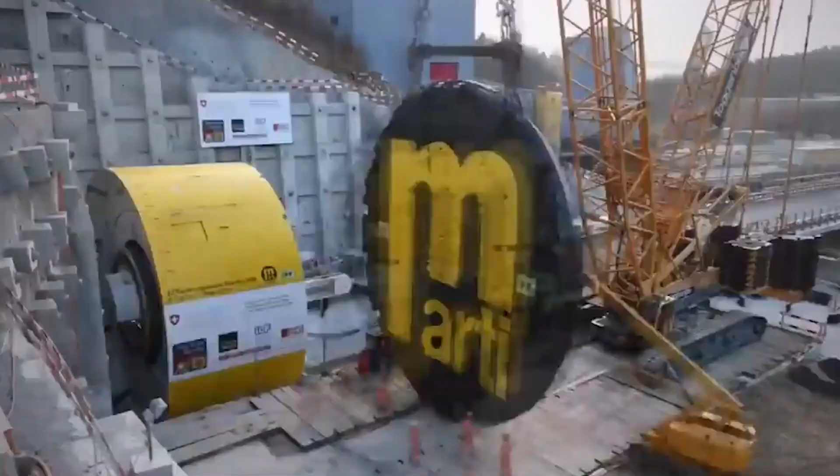Deep beneath the rugged terrain of the Alps, the France Tunneling Project is pushing the boundaries of engineering. Imagine a world where distance shrinks, where bustling cities are but a train ride away, where the pulse of trade is harmonized with the beat of progress. This is exactly what the Turin-Lyon Tunneling Project promises, and the Bussoleno interconnection tunnels are a vital component of this.

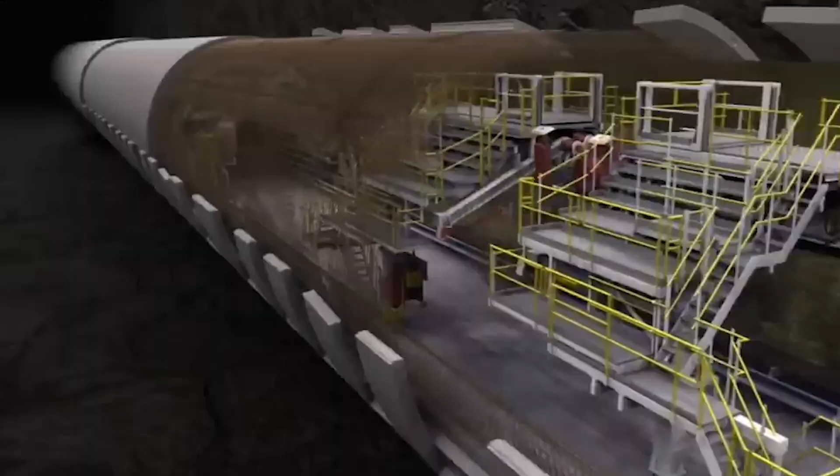Join us as we delve into the ambitious France Tunneling Project, which aims at connecting a new cross-border railway line between Turin in Italy and Lyon in France. The Turin-Lyon Tunneling Project, or the Lyon-Turin Railway Line, as it's more casually known, is a convergence of engineering prowess and visionary connectivity. This ambitious endeavor is being carried out to combine the urban parts of Lyon, France, and Turin in Italy through interlinks of metro lines.

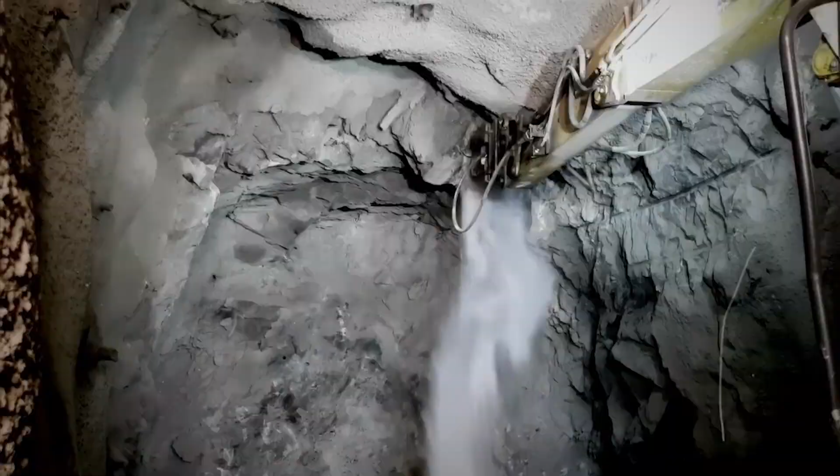Imagine a system of harmonious, high-speed railway lines, tunnels that cut across the heart of mountains, and the bridges that span chasms. The Bussoleno interconnection tunnels encompass preparatory and tunneling works aimed at linking the new cross-border railway line with the historical Rete Ferroviaria Italiana (RFI) line in Italy.

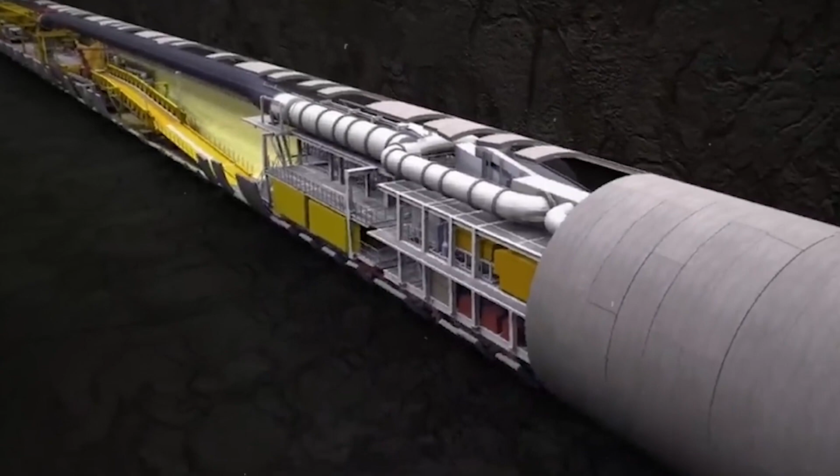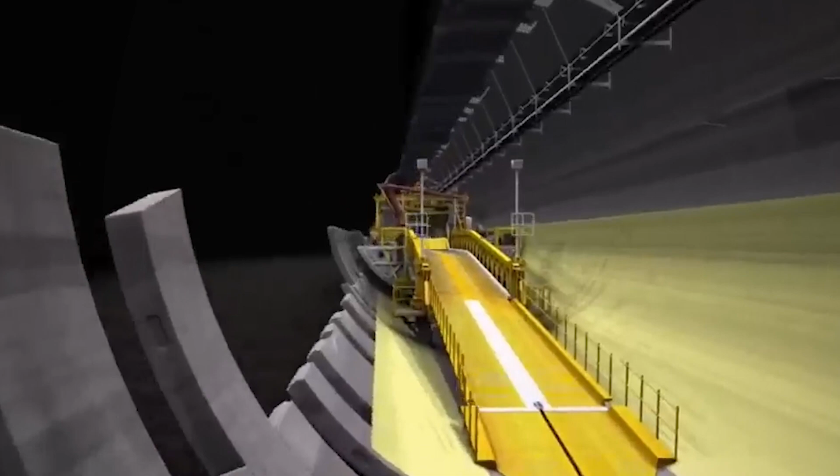This connection tunnel forms part of a broader construction project that spans 270 kilometers of high-speed rail line from Turin to Lyon. It is projected to take approximately 10 years to complete the construction phase, and once completed, the Mont d'Ambin base tunnel will become the longest rail tunnel in the world, surpassing the Gotthard base tunnel.

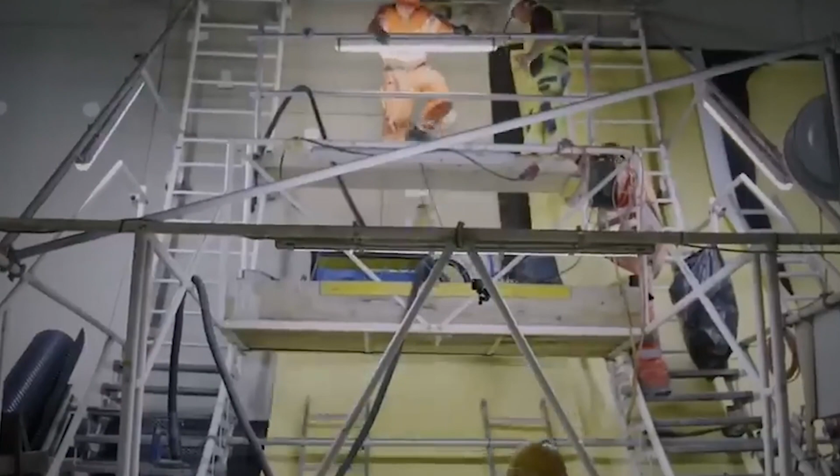But what makes this project worthwhile, and why is it of the utmost significance? Enhancement of connectivity between major European countries is the key. By establishing this link, both countries have a lot to gain in terms of reduced travel times, which will ultimately bring about enhanced trade through freight transportation and therefore economic growth. It will attract investments, create job opportunities, and even impact the environment for good.

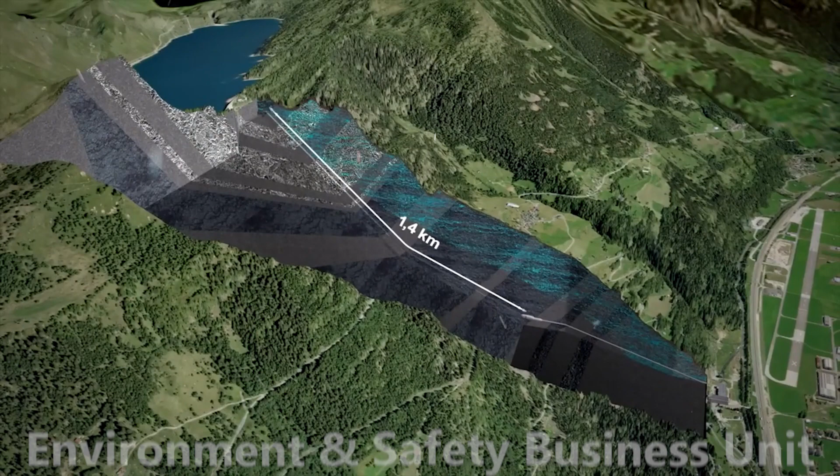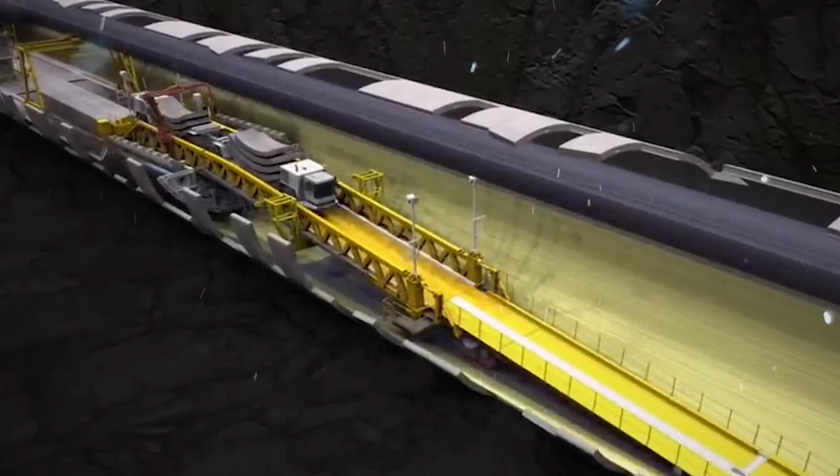And even better, the Société des Contrôles Techniques, Socotec, is acting as a key player in ensuring environmental compliance through the Turin-Lyon Tunneling Project, particularly through its specialized division known as the Environment and Safety Business Unit. However, the Turin-Lyon Tunneling Project is more than just a rail link. It comprises multiple interconnected components that collectively form the foundation of the high-speed rail link between Lyon and Turin. And each of these components plays a critical role in ensuring the project's success.

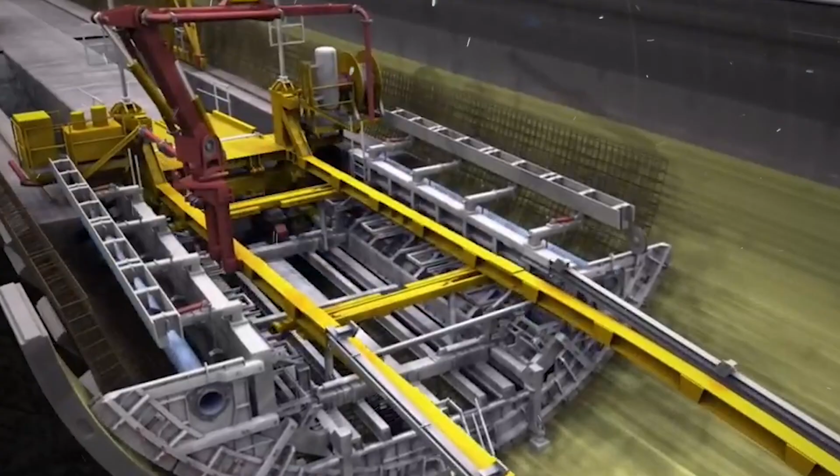There's the high-speed railway lines, which you're already familiar with by now. But there's also the Mont Cenis base tunnel and its accompanying access tunnels, which provide entry and exit points to the base tunnel. Next, we have bridges and viaducts, stations and emergency facilities, lighting, and finally, safety systems. We'll be breaking each component down, starting from the crown jewel, the Mont Cenis base tunnel.

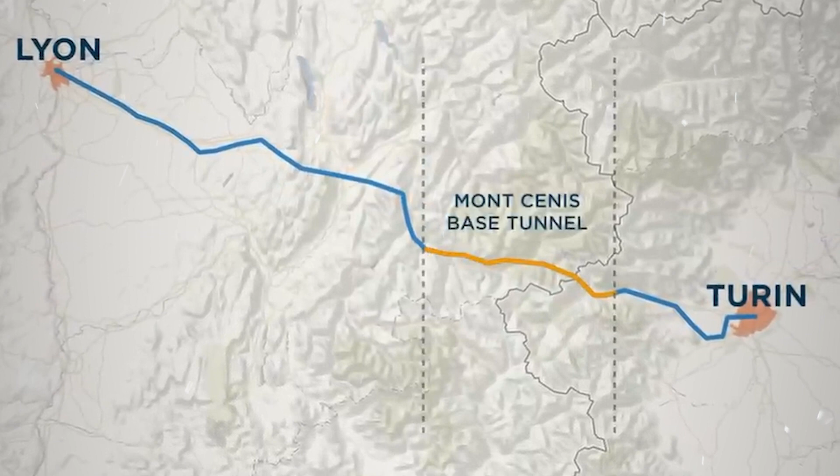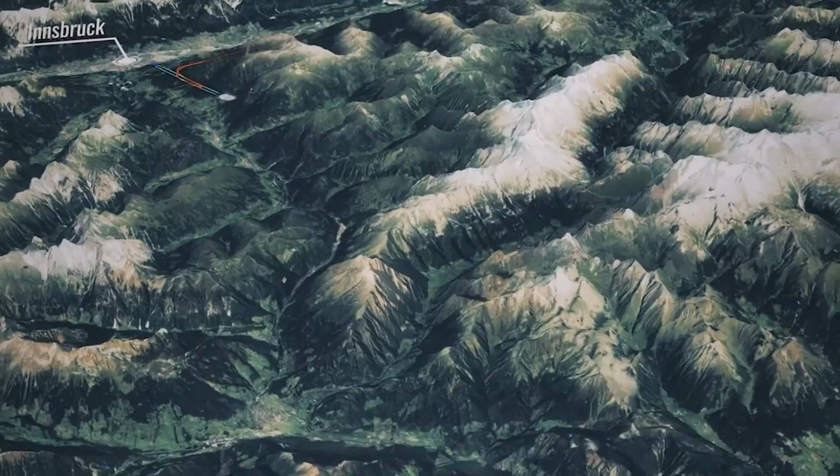Also known as the Mont d'Ambin base tunnel, it traverses the Alps and serves as a crucial section of the cross-border route. You see, this base tunnel serves as the core element, providing a direct route through the Alps, overcoming the challenging mountainous terrain that previously posed barriers to efficient rail travel. A subterranean marvel, this tunnel with its twin tunnels stretching over 57 kilometers doesn't just traverse the Alps, it practically erases them. With the base tunnel in place, high-speed rail doesn't need to dodge mountains, it just surges through them.

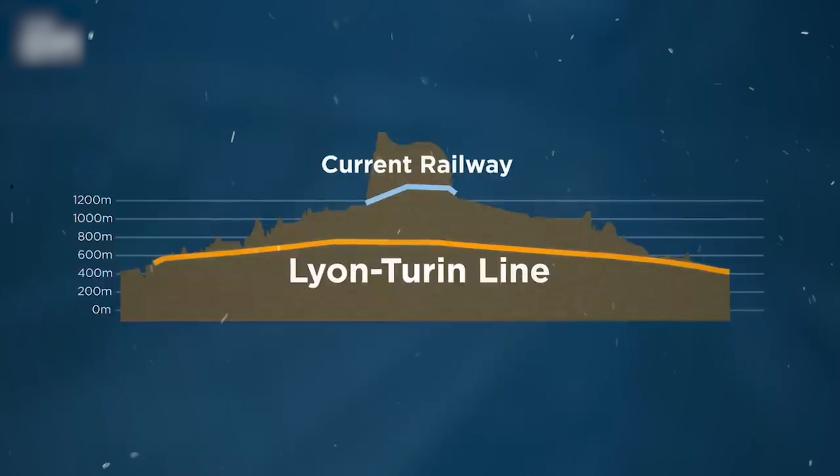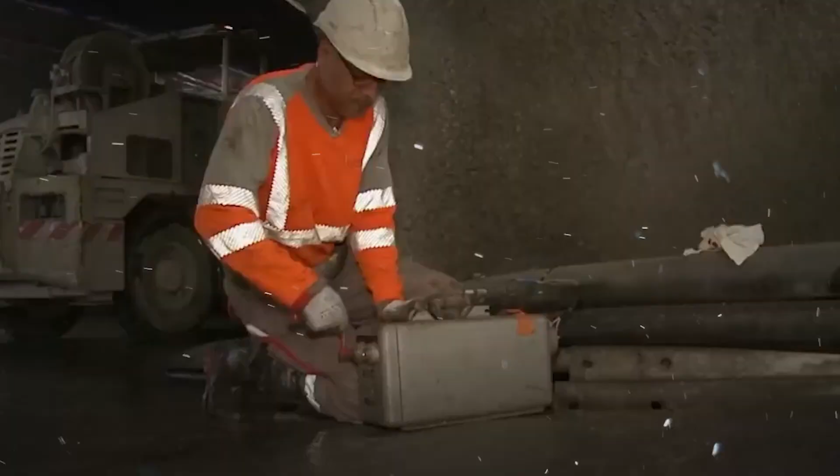Stretching over an impressive length of 1.9 kilometers each, the construction of the Bussoleno Connection Tunnel involves the excavation of 2 single-lane tunnels. These tunnels will be equipped with the necessary infrastructure to ensure seamless connectivity, including 2 interconnection chambers that will facilitate the integration of the future Orsiera tunnels on the western entrance side. Additionally, the project requires the construction of 2 portals and their associated cut and cover sections, providing access points to the tunnels. 2 dismantling chambers will also be built to house the tunnel boring machines used for excavating the Orsiera tunnel. To enhance safety and accessibility, 6 cross passages will be constructed within the tunnels.

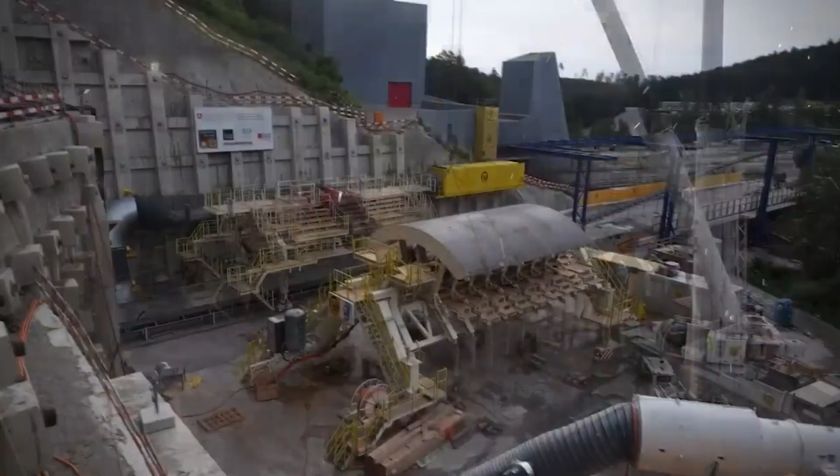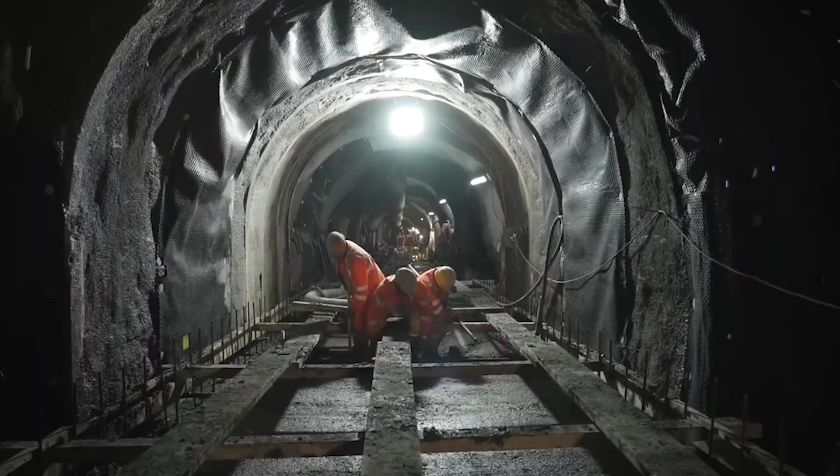Needless to say, the Bussoleno interconnection tunnels, with a project value of about 140 million euro, hold immense significance for the region's transportation landscape. It is expected to have a construction duration of about 86 months. One of the key benefits of the Bussoleno interconnection tunnels is the reduction in travel time between Turin and Lyon. Currently, the journey between the two cities involves a circuitous route leading to longer travel durations and inefficiencies. Once the high-speed rail line is completed, the Bussoleno interconnection tunnels will provide a direct and efficient connection, slashing travel times and enhancing convenience for commuters and businesses alike.

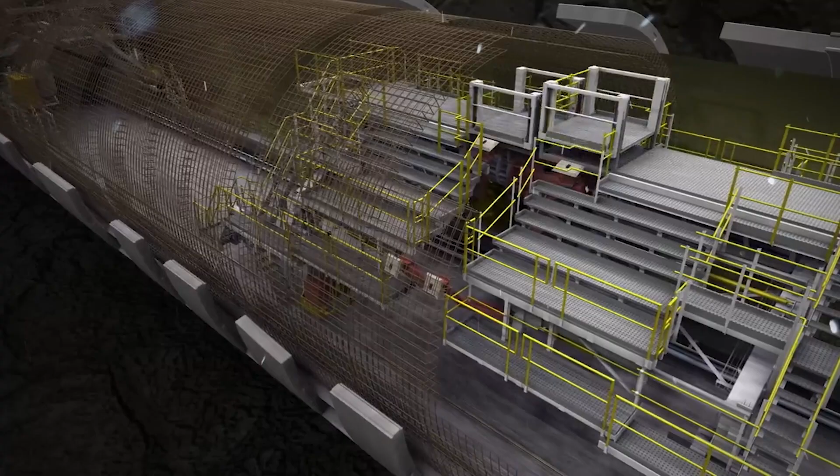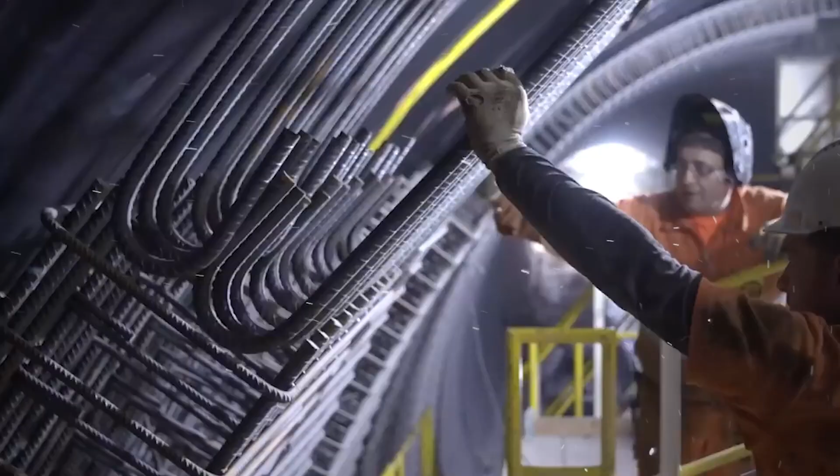Next, think of access tunnels as the gatekeepers, ushering trains into the mountains and releasing them back into daylight. Of course, stations and emergency facilities enhance passenger safety, convenience, and emergency response capabilities. The bridges and viaducts provide critical connections, allowing trains to traverse obstacles, and lighting systems contribute to passenger safety and operational efficiency within the tunnels and stations.

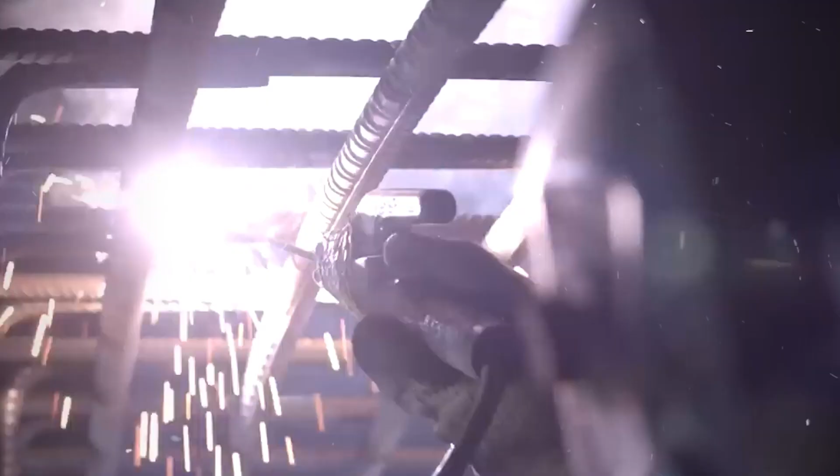It might sound pretty clean-cut and clear, but no grand project is without its obstacles, and this grand tunnel project certainly has its. The Alps may be scenic, but construction here is no easy feat. They consist of complex geological formations, towering overburden depths, and pressurized rock conditions that demand respect. From Ultra-Dauphinois to Briançonnais and Piemontais, each formation presents a unique puzzle as they vary in composition, hardness, and stability, posing significant challenges for tunnel excavation and rock support.

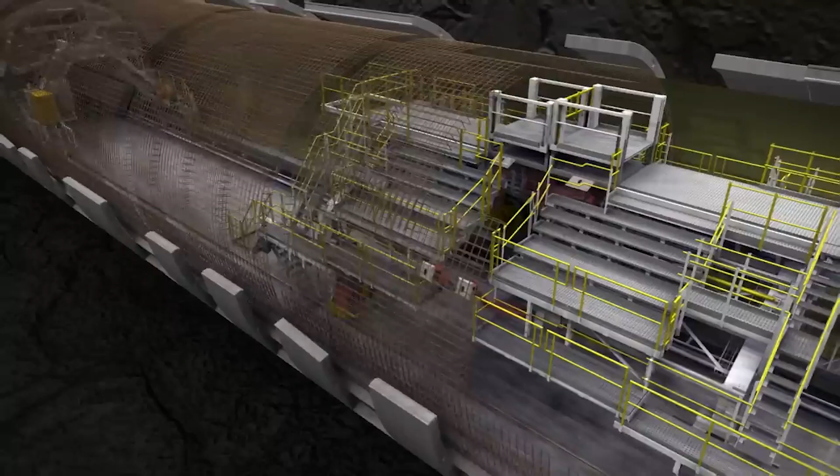Then there's the fact that the tunnels are being excavated at substantial depths, with overburden reaching up to 2,400 meters. Some sections of the tunnels also encounter pressurized rock conditions, leading to squeezing and potential rock bursts. Pressurized rock formations can also cause stability issues. These challenges require specialized solutions, a symphony of excavation methods, and innovative methods that would conquer the challenges posed by formidable rock formations and pressurized conditions.

Introducing TBMs, tunnel boring machines that relentlessly chew through the earth, carving out long tunnel sections with mechanical precision. These giant machines represent the pinnacle of tunnel excavation technology, offering a continuous and efficient method for navigating the rocky labyrinth that lies ahead. But not all sections can yield to the mechanical prowess of TBMs.

In areas where the rock conditions prove particularly unforgiving, the NATM, New Austrian Tunneling Method, steps in. NATM employs a more hands-on approach, involving a delicate dance of drill and blast. Here, skilled workers meticulously drill holes, strategically place explosives, and orchestrate controlled blasts, carefully sculpting the tunnel profile and the challenging geological backdrop. Excavation alone is not enough to ensure the stability and safety of the tunnels.

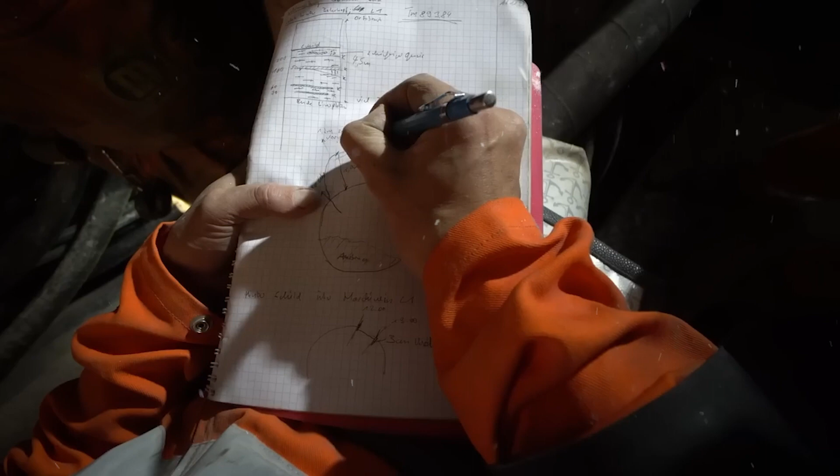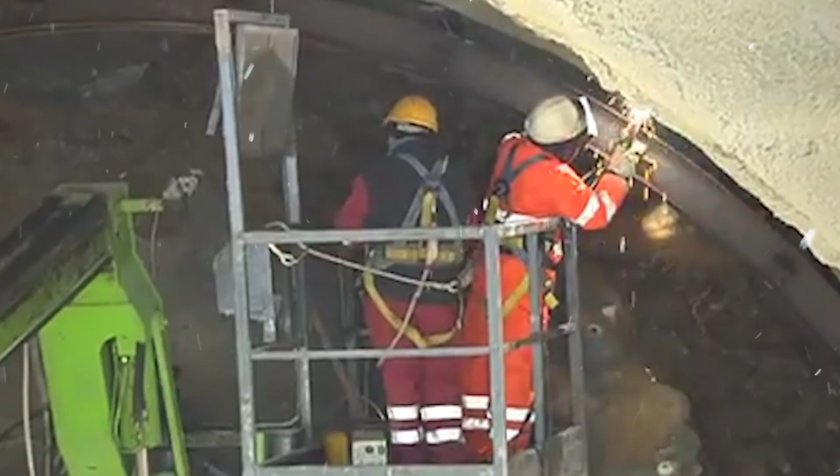Rock support becomes very important. Shotcrete, a special blend of concrete and other materials, is sprayed onto tunnel walls, creating a protective layer that stabilizes the surrounding rock. Additionally, rock bolts are installed, acting as the unsung heroes that reinforce the rock and stand guard against potential collapses. In sections where the rock quality leaves much to be desired, steel arch supports swoop in to save the day. These resilient structures provide much-needed reinforcements, distributing the load evenly and offering an extra layer of support where it's needed most.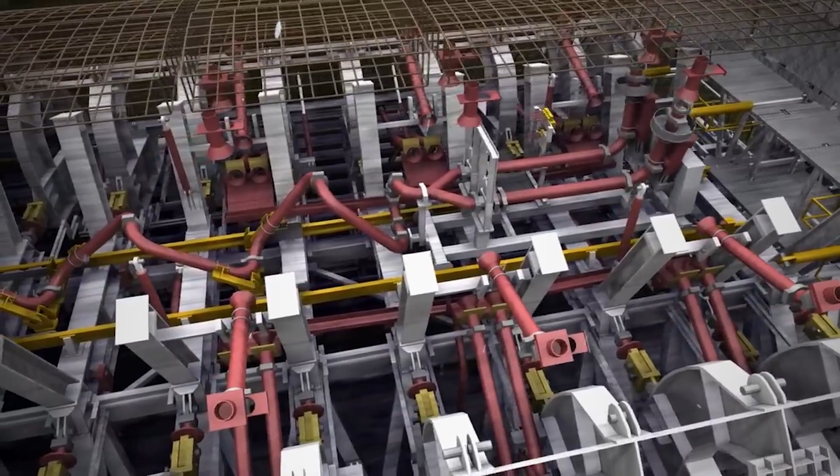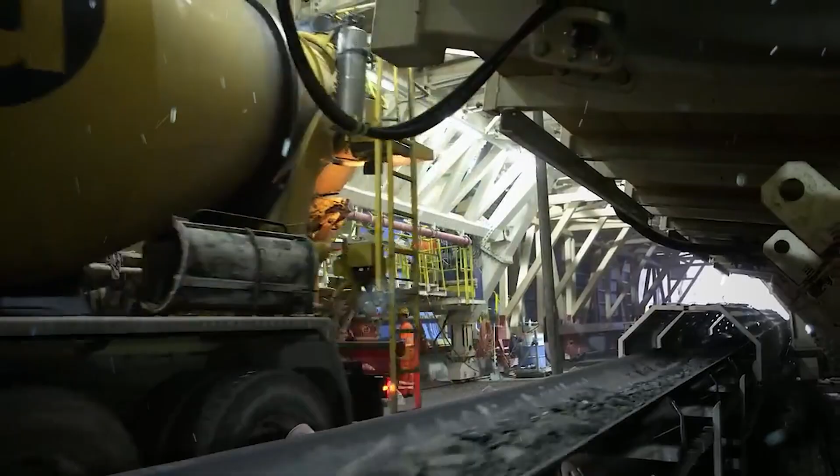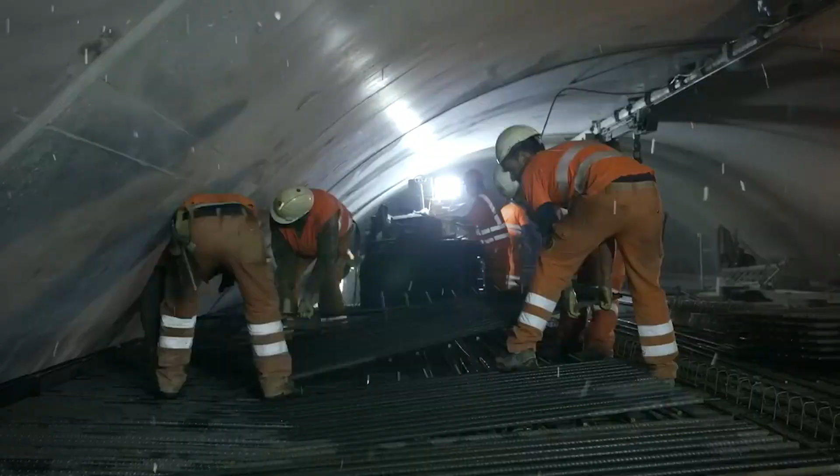Every aspect of the tunnel, from the diameter to the shape, is carefully considered to navigate the unique geological conditions at hand, and as construction progresses, ventilation and safety measures take center stage. Pressurized rock conditions require effective ventilation systems to manage gas emissions and pressure changes. Ventilation shafts are strategically placed, ensuring a constant flow of fresh air deep within the tunnel's belly. This creates a safe working environment for the construction crews, allowing them to navigate the challenges with confidence.

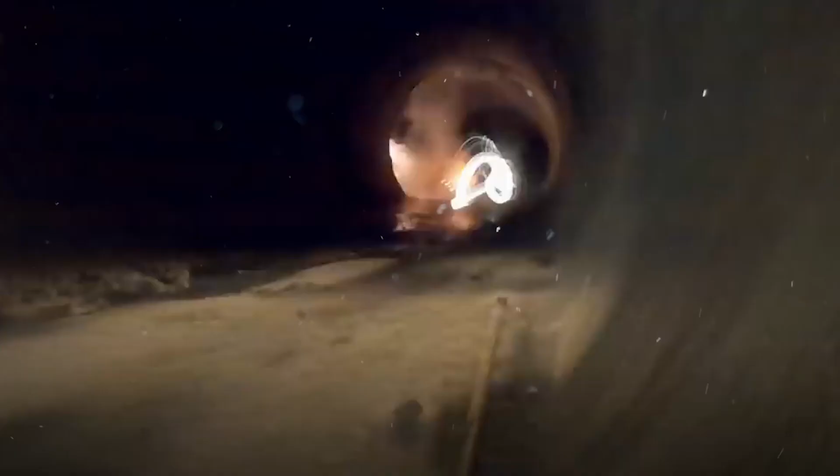But safety doesn't stop at ventilation. Advanced monitoring systems become the silent guardians, tirelessly tracking every minute movement of the rock, every shift in pressure, every geotechnical factor that could hint at potential hazards. Real-time data also provides invaluable insights, empowering the construction teams to anticipate and adapt their methods, ensuring the safety of both the workers and the tunnel itself. So the experts found a way to work around the drawbacks.

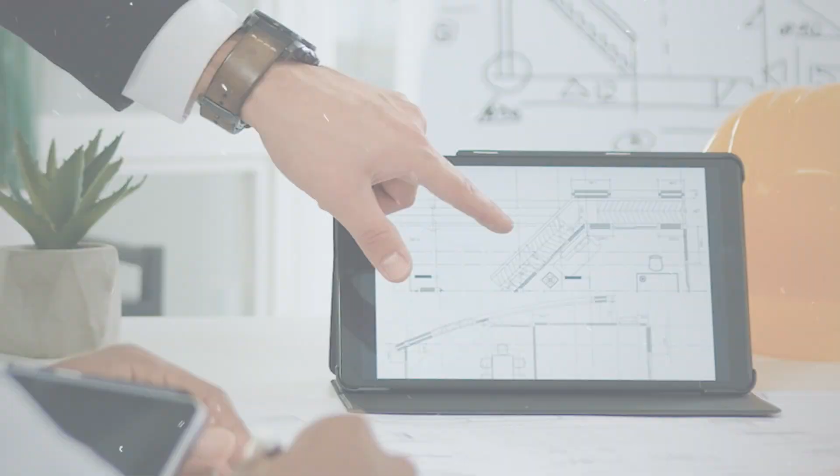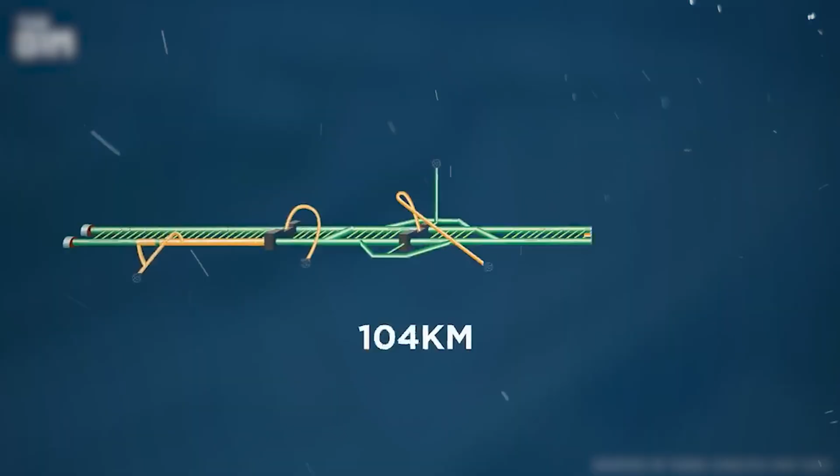But we can all agree that these specialized solutions and brilliant fixes the experts came up with obviously require some huge funds. So let's dive into the visionaries at the helm of this project. This project couldn't have been executed without the collaboration of certain stakeholders. At the center stage are the governments of France and Italy. They're in charge of directing the funding, strategy, and regulatory oversight. But Tunnel Euralpin Lyon-Turin, TELT, is behind the project's implementation. This company's coordination of design, construction, and finance is of epic proportions.

Lastly, the European Union, akin to a patron, handles the financial support. And we're talking about a lot of financial support. The EU has committed to providing 40% of the financing, but there is a possibility of increasing its contribution to 50% and partially funding the French accesses, depending on certain conditions. About 8.6 billion euro hangs in the balance and is estimated to be the cost of the project. This budget encompasses various aspects of the project, including tunnel excavation, construction of access tunnels, development of rail tracks, installation of safety and electrical systems, and more.

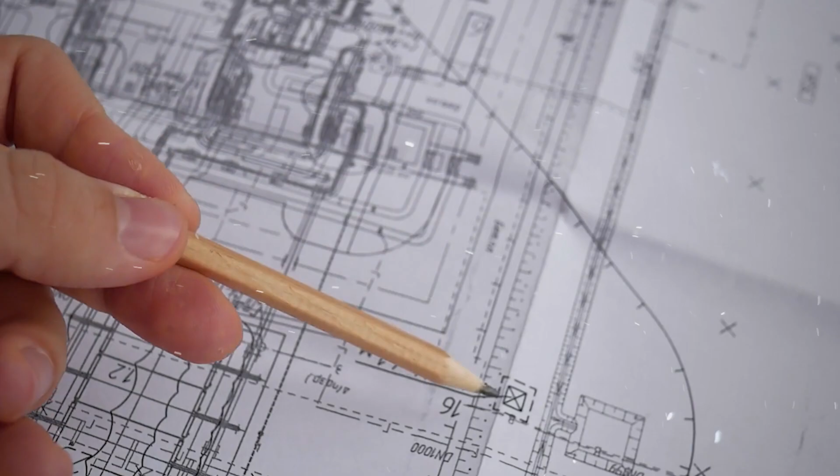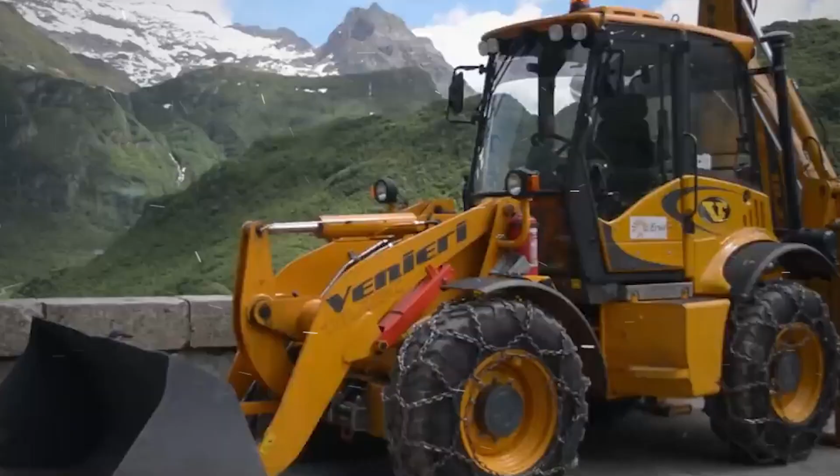But it's not just the EU's doing. This project is co-financed by other peripheral stakeholders, with contributions from both France and Italy. With such backers, it's no wonder there's so much innovative engineering in the construction of this undertaking. But it's not all rosy, and there have been skeptics arising on the matter of the environmental impact of this project. Of course, as with any large-scale infrastructure project, there are valid concerns raised about its impact on water resources, landscape alteration, and carbon emissions during construction.

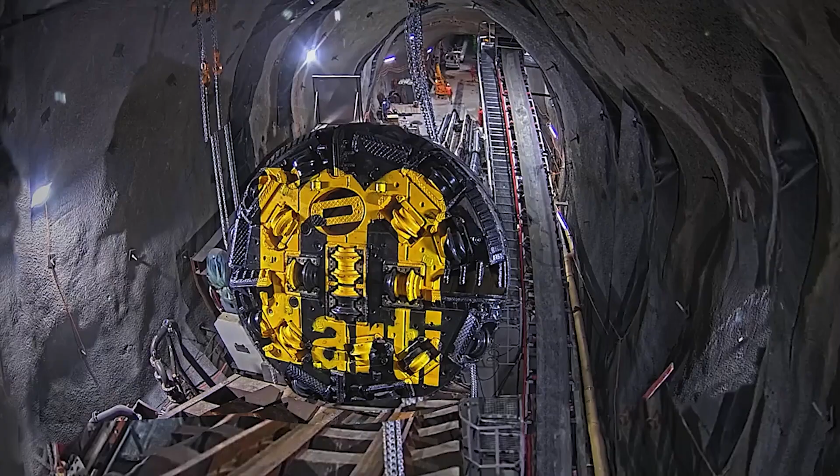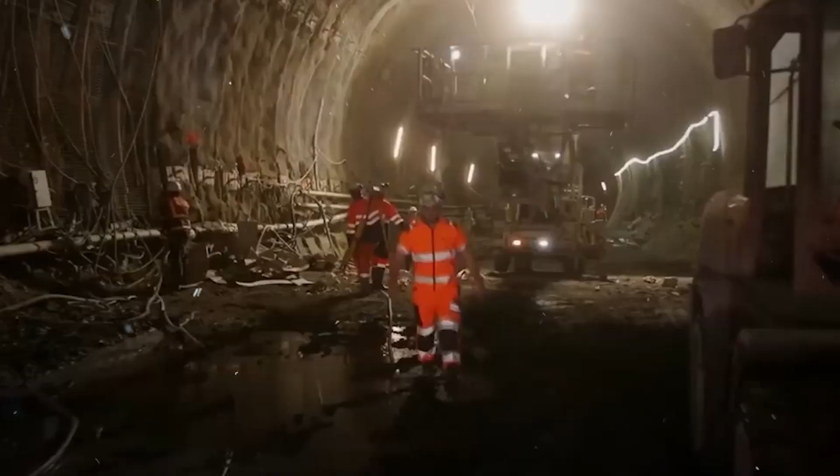For one, water, they say, is a vital resource, and construction's thirst can parch the land. This is true. Critics are worried that the construction activities associated with the project could deplete water reservoirs, causing harm to local communities and ecosystems. However, a counter-argument is that the amount of water needed for construction is relatively small compared to the overall availability of water resources in the region. Backers of the project also emphasize that measures are in place to manage water usage responsibly and minimize any negative impacts. Plus, when you look at the long-term benefits the project brings, such as improved transportation, reduced road traffic, and enhanced trade, these could contribute to regional development and water conservation efforts.

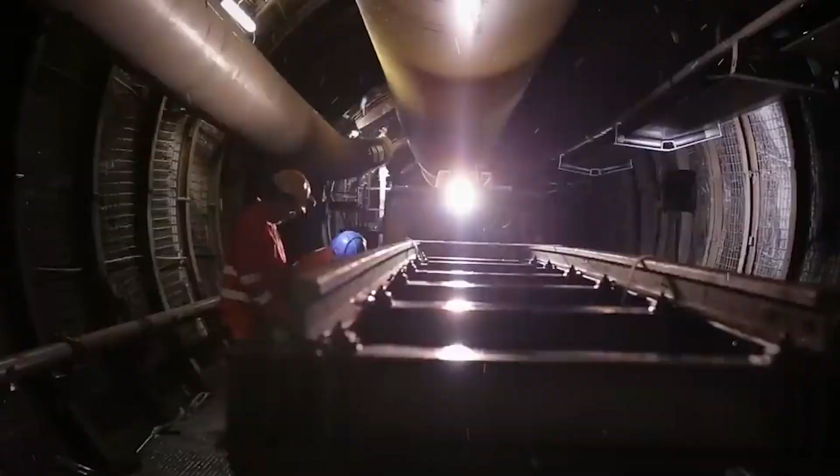Another concern voiced by critics is the alteration of the alpine landscape due to construction activities. Deforestation, excavation waste, and visual disruption are real negative consequences. In response, the project's design takes into careful consideration the minimization of landscape alteration and the restoration of affected areas post-construction, so it's supposedly all good.

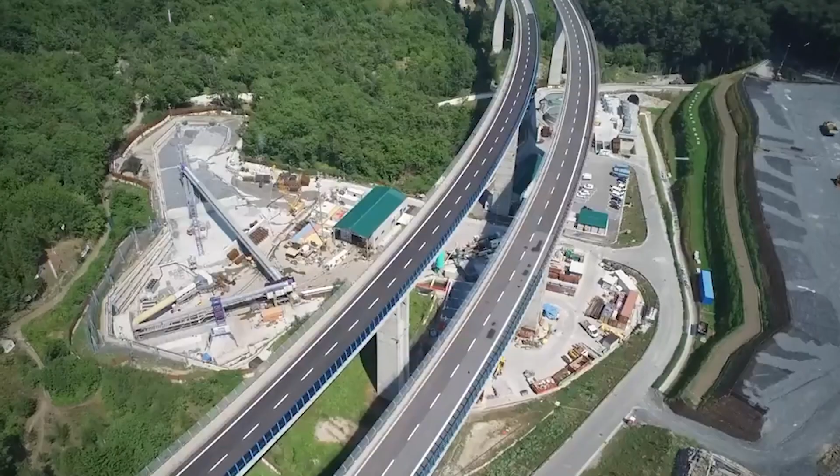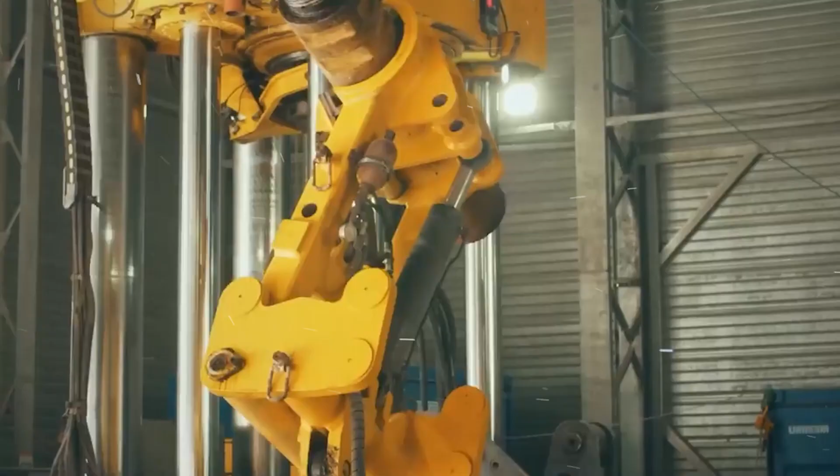Lastly, skeptics worry about the amount of CO2 emissions that would arise from this project. However, one could argue that one of the key benefits lies in the project's focus on modal shift and CO2 reduction. By prioritizing the shift of freight transportation from road to rail, the project sets the stage for significant CO2 reductions over time. This emphasis on energy-efficient rail transport aligns with decarbonization objectives and supports a more sustainable mode of freight movement.

Improved air quality is also another positive outcome of the project. By reducing road traffic congestion through enhanced rail connectivity, the project contributes to fresher and better air quality overall due to reduced emissions of air pollutants. This has direct positive effects on public health and environmental well-being. Ultimately, this entire project doesn't just link two cities, it unites Europe. Cross-border travel will become the norm, economic ties will strengthen, and cultural exchange will flourish in the long run.